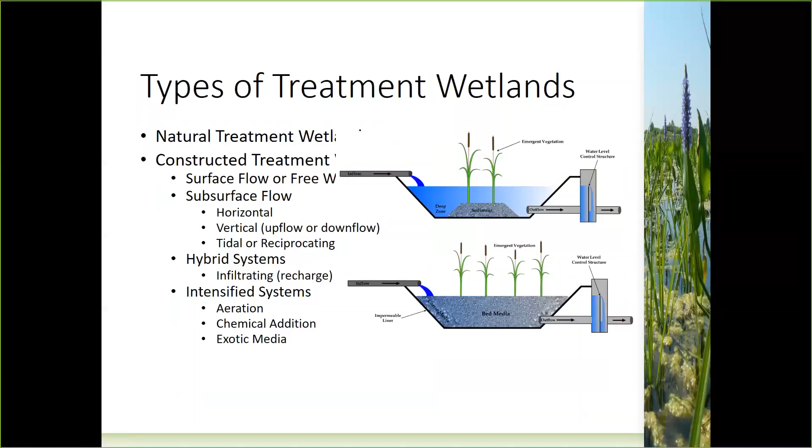There are other chemical supplements that are sometimes added that maybe make up for trace nutrients or elements that are missing for some of the processes. Various types of media can be used to provide additional adsorption surfaces. So there's a whole range of different types of projects out there.

When we get into Florida in particular and start to look at what's been done, they really fall into these two categories. There are a dozen or so natural treatment wetland system projects where existing hardwood wetland communities that maybe have had some kind of hydrologic degradation over time could use supplemental water, and have been used as a way to further polish municipal wastewaters or, in some cases, treat stormwater.

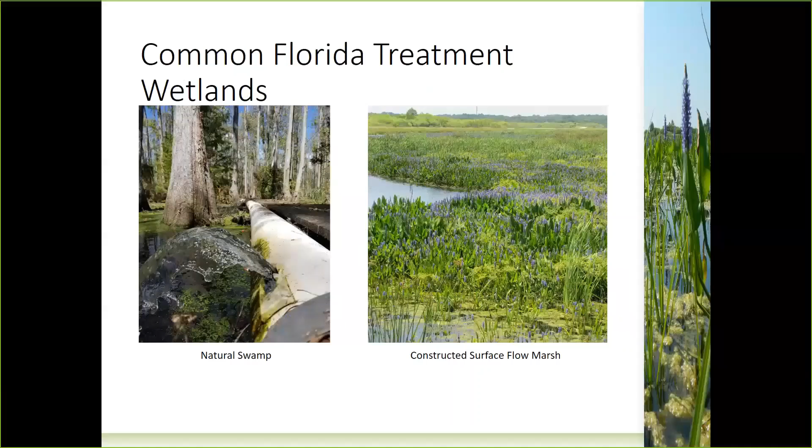What most of the constructed wetland projects are in Florida, and this represents certainly the STAs that the South Florida Water Management District has constructed south of the lake, are these constructed surface flow marshes. Within those marshes, which make up most of the types of systems that have been constructed in Florida, we talk about different plant communities. You've heard reference to most of these today.

Floating aquatic vegetation there in the top left. Emergent aquatic plants, these are the typical marsh plants you see in roadside ditches and retention areas. Submerged aquatic vegetation: we heard Cassandra mention coontail and the naiad and some of the species that were in the C-43 mesocosm study.

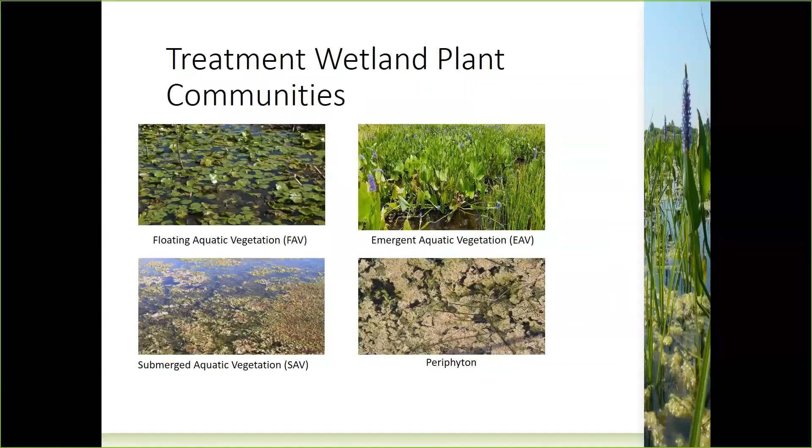And then the periphyton, which we've seen a little bit of discussion about here, which is more of a calcareous algal community that has a real affinity for binding up phosphorus in the water and tying that up in insoluble calcium phosphate compounds.

While most of these pictures of these nice pretty green systems with plants and water maybe don't look like an engineered system, the reality is that the ones that are designed well and operate the best truly are engineered treatment systems. There's every bit as much science and engineering fundamentals behind their design as there would be in a conventional wastewater treatment plant or a highway or bridge project. So don't let their beauty fool you. There is some real science and engineering behind them.

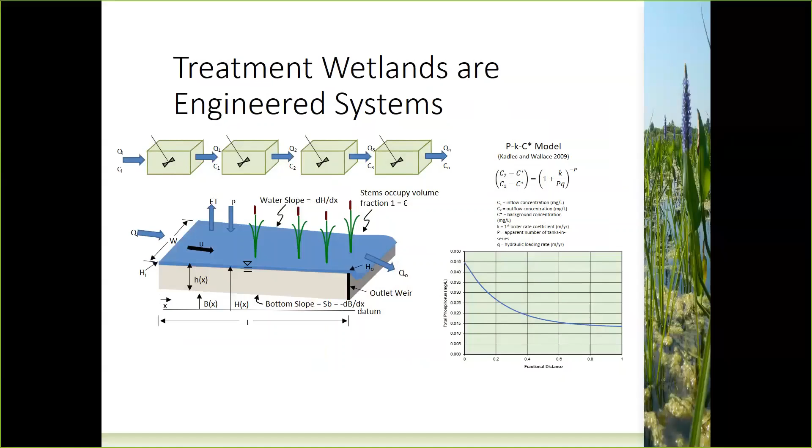I will not go through this in detail and give you a quiz at the end of the presentation.

With that said, these have been used across the United States and Florida for about the last 40 to 50 years. Some very pioneering work was done out of the University of Florida beginning in the late 70s, early 80s, with parallel efforts in Michigan, looking at both cypress swamps in Florida and constructed or natural marshes in Michigan to accept, in most cases, municipal wastewater effluents, polish those nutrients out, reduce the organic loads, as well as provide other water quality benefits.

So why do they work so well? Well, there are a lot of physical, chemical, biological processes that naturally occur in wetlands, whether natural wetlands or constructed systems that replicate those functions. Some are shown here. There are photolytic reactions driven by solar energy that can break up different compounds in the water. There's adsorption to sediment surfaces, new detrital surfaces, biofilms that cover the plant stems and the bottom of the wetland.

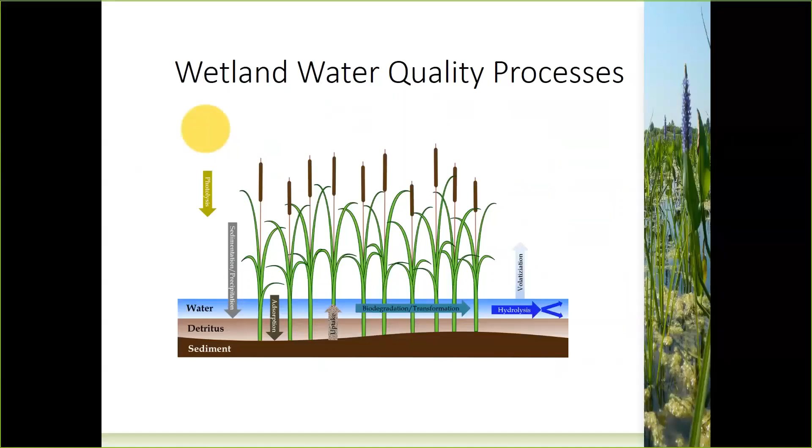Biochemical oxygen demand, that's a measure of the organic matter that's in the waste stream or the water that's being supplied to that system. That can typically get down to about a 2 milligram per liter level. Similar with total suspended solids, whether they're algal-based solids or some other form of solids, removal in wetlands is typically good for those when they're well vegetated

and operated well. The focus here has been on nitrogen and also on phosphorus in South Florida. We see that nitrogen removal in wetlands can get to 1 milligram per liter, and I'm going to show you 3 projects where those types of levels have been achieved.

The inorganic nitrogen that we've heard quite a bit about already today, the ammonia and the nitrate components, are virtually eliminated in most treatment wetland systems. The natural background concentration for those particular forms of nitrogen is effectively 0. So we can very often, particularly in the summer, when kinetics are maximized at higher water temperatures, get right down to analytical detection limits for the inorganic nitrogen parameters.

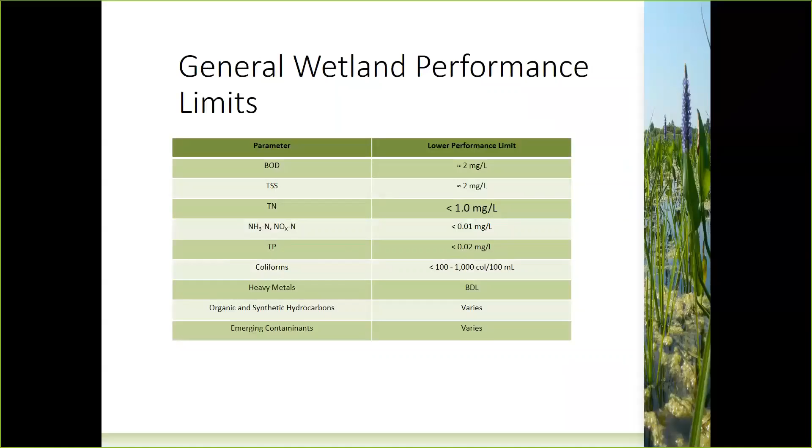Similarly, there are multiple pathways for removal of heavy metals, organic and synthetic hydrocarbons, and a wide variety of emerging contaminants that are starting to break into the news now. We hear about endocrine disrupting chemicals and personal care products and pharmaceuticals, sucralose, those types of things that come out with the waste that leaves our homes and goes through wastewater treatment processes and isn't completely removed in conventional treatment systems. Some of those parameters are very effectively removed in a polishing type wetland system.

All these forms kind of move around and interchange between the water column and the sediment compartment, and then as you move through the wetland, they change in form. There are processes available there that mineralize organic nitrogen to ammonia. There are nitrifying bacteria in there that will take ammonia and convert it to nitrate. And what's really beneficial in wetlands, as you heard Cassandra speak about just before the break, is the denitrification process.

Wetlands at their sediment interface are very anaerobic typically. It's a low oxygen environment. There's dissolved organic carbon that's provided by the vegetation in the system. There are biofilms or slimes that are full of microorganisms that cover all the plant stems and the entire bottom of the wetland. And you put those three things together and you get very effective removal of nitrogen through denitrification, leaving the water column and gassing off to the atmosphere.

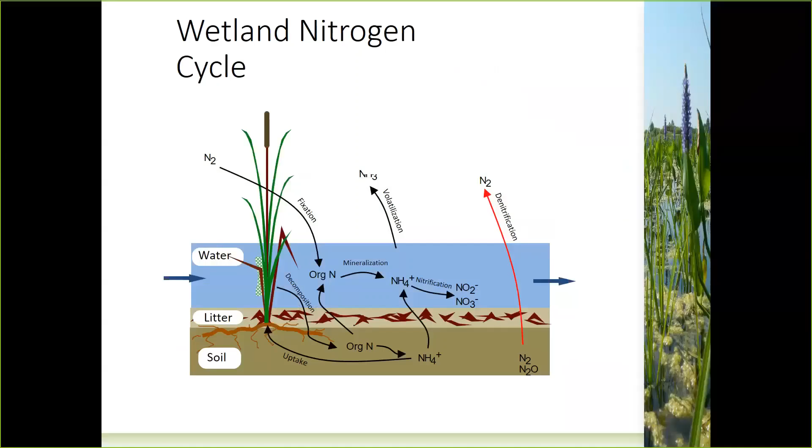3 projects I'm going to highlight now that treat different types of water across the state of Florida, but have all shown a similar ability to get to very low nitrogen levels. First one is the Orlando Wetlands Park, which is just east of the city of Orlando in the strangely for Florida named town of Christmas. It's been in operation since 1987, and it treats advanced wastewater from the city of Orlando's Iron Bridge Water Reclamation Facility. It treats a flow of about 16 million gallons a day. It's 1,200 acres in size.

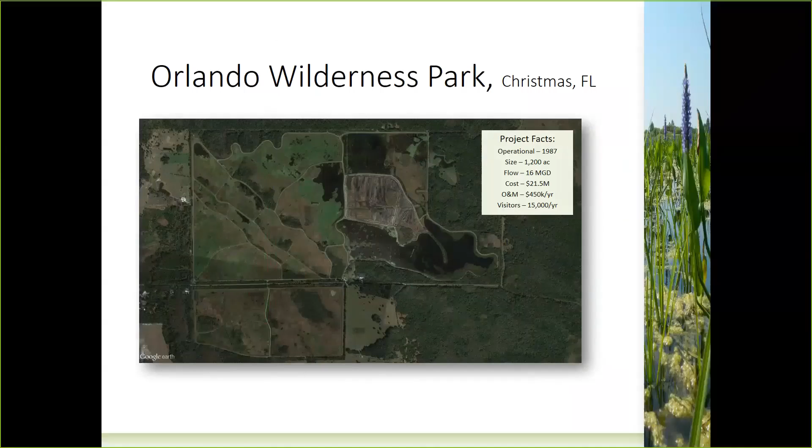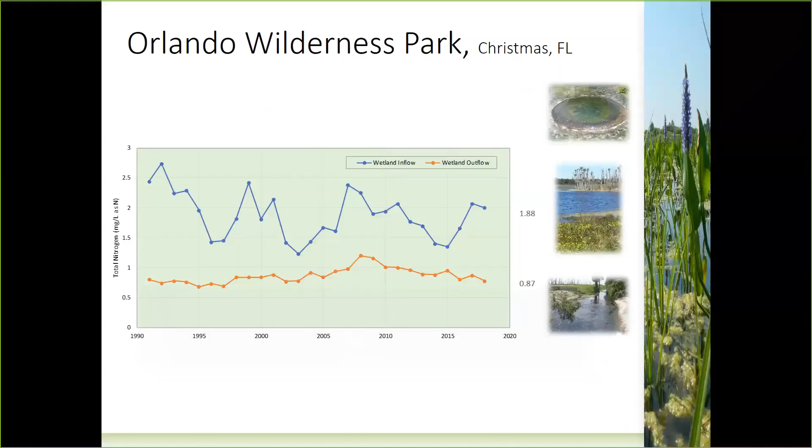So we see that over this long operational history, the inflow nitrogen for this facility has averaged 1.88 milligrams per liter, and the outflow has been well under 1 at 0.87. Again, this is one that treats all municipal advanced treated wastewater.

This next project is located in Gainesville. It's called the Sweetwater Wetlands Park. This one treats combined flows of treated municipal wastewater, reclaimed water, as well as watershed runoff from a several thousand acre urban watershed.

But as you see, because you've got that denitrification process, it works so well in wetlands, we don't have any problem getting this system down to about that 1 milligram per liter mark for total nitrogen leaving and going to the receiving system.

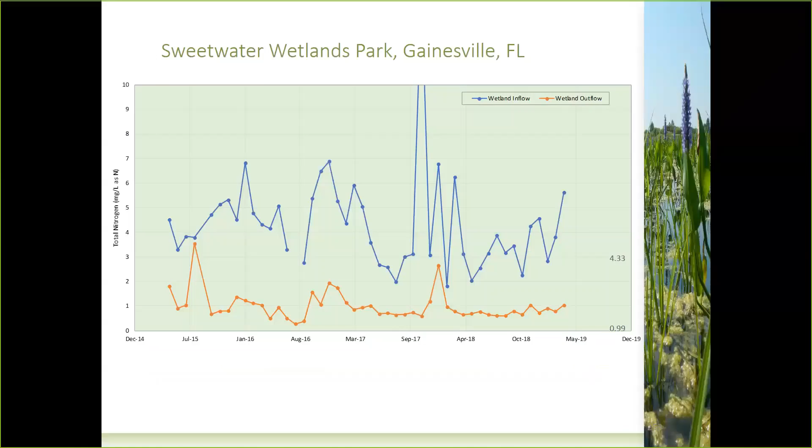The last project is one that's a little closer to where we are now. This is Freedom Park in Naples, which treats purely runoff. This is not a reclaimed water project or a reclaimed and stormwater combined project. This one's all watershed runoff. It's capturing the water from about a 3,000 acre watershed and treats about 200 million gallons per year of flow and reduces those concentrations in that nitrogen by about 41%.

And we see that this treatment wetland system is similarly capable of getting those nitrogen concentrations down below a milligram per liter. So again, this is because all the inorganic nitrogen basically is being removed, and those little bits of available organic nitrogen that are being produced in the system, as Cassandra showed, are also being consumed and reduced.

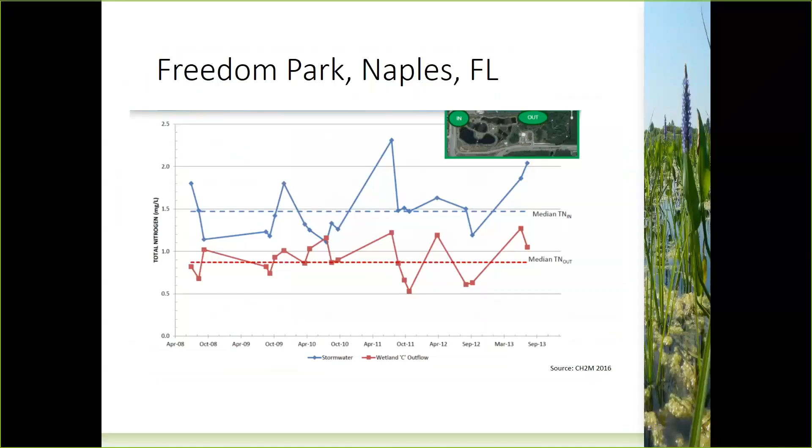As part of some previous projects for the water management district, we looked at performance from a range of systems across the state, evaluated those data based on vegetation type and soil type, and started to see if there were any differences there. And what was interesting for nitrogen, and this was borne out again in the mesocosm project that we just heard about, was that there wasn't a very clear difference in performance across vegetation type for total nitrogen.

The same is not true for phosphorus. The submerged aquatic plant periphyton community showed a much better removal efficiency for phosphorus as a function of vegetation type. So there's some differences there depending on what parameters you're really interested in improving.

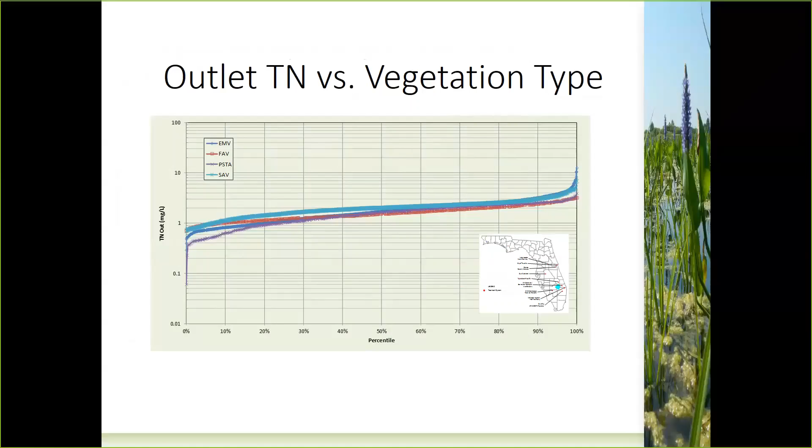However, when we look at it based on sediment type, we found some very interesting differences relative to total nitrogen removal. We grouped these based on the natural substrates that were there for those treatment wetland systems, whether they were clay, peaty organic soils, sand, or lime rock. And what we found was that the sandy mineral soils consistently produced the lowest nitrogen concentrations.

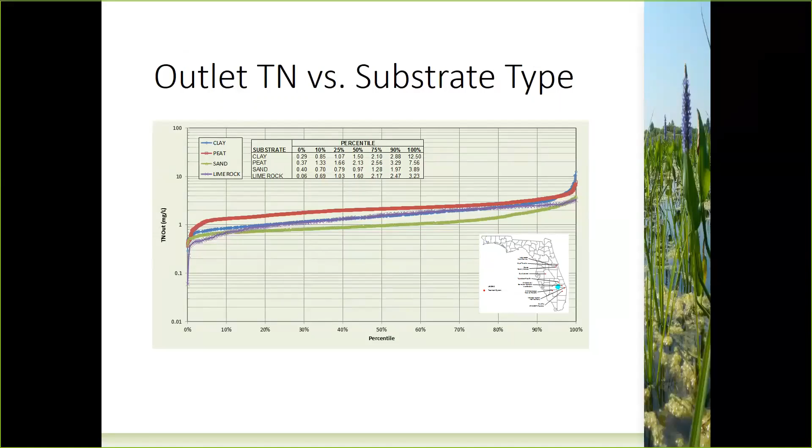That is why this kind of spiraled into the work that Cassandra talked about, why the soils that were put into those mesocosm tanks were sandy soils from that site, and why we went to the next step of then looking at any labile nutrients that were there and doing the acid and peroxide rinses to liberate those and free them and be able to really compare that difference. But kind of across the board, and this is consistent with the Freedom Park project, the Orlando project, and to some degree the Sweetwater project, they're all constructed on mineral soils.

There are differences in how you approach a design and how you approach operation, whether you're concerned with load reduction or concentration minimization. There are big differences between the STAs that are south of Lake Okeechobee that are trying to minimize the outflow phosphorus concentration versus the couple of STAs that have been constructed on tributary inflows to Lake Okeechobee, such as the Taylor Creek STA, that is focused on load reduction.

They operate at different efficiencies and they operate with somewhat different purposes. So it's important to understand at the outset of a project what's the goal, so that you can approach the design in the right way.

As we just saw on the previous slide, selecting the right site. The soils matter. If you want to go and absolutely minimize nitrogen concentrations, probably don't go build an STA or another type of treatment wetland system on a peaty organic field. Choose a better place for it.

Maximizing hydraulic efficiency. This is that whole green blob thing. You can have something that looks like it's unorganized and maybe just this green space, but if you really want to maximize the water quality performance benefits out of that area, the grading design is important. The location of inlet and outlet structures, the internal flow redistribution is important. How it's analyzed, how the cell geometry is laid, and how that relates to velocity and depth control and a whole variety of other issues.

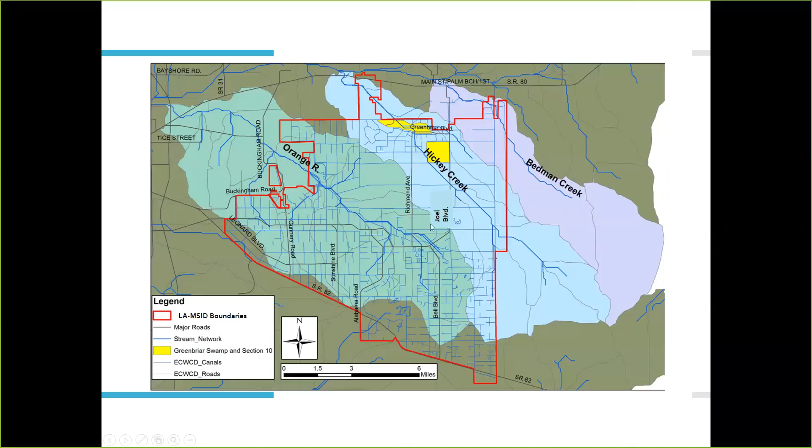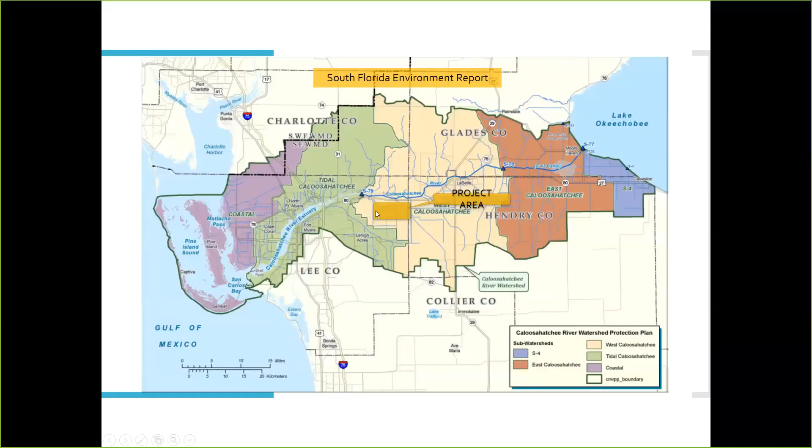And we've seen this picture today where the project area is. You can see our project area that we're going to look at today is about in the center. This is our district. It's 110 square miles. It has 311 miles of canals, 20 lakes, culvert crossings. We have quite a few weather stations, 31 weather stations. We have 109 water control structures, and 64 of them are automated, so we can control where our water goes pretty good.

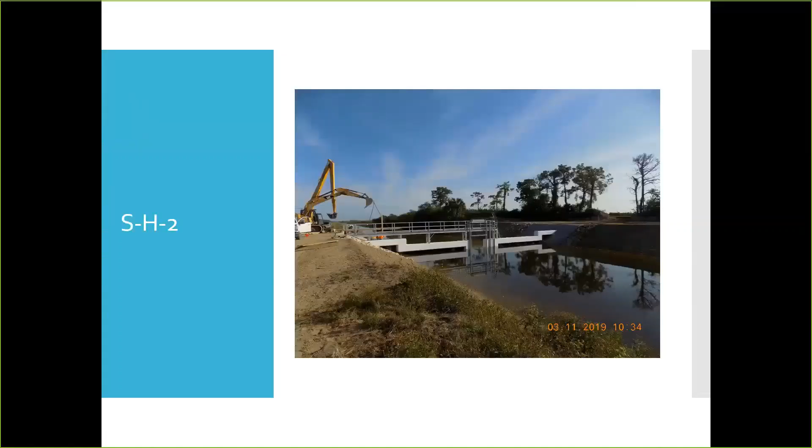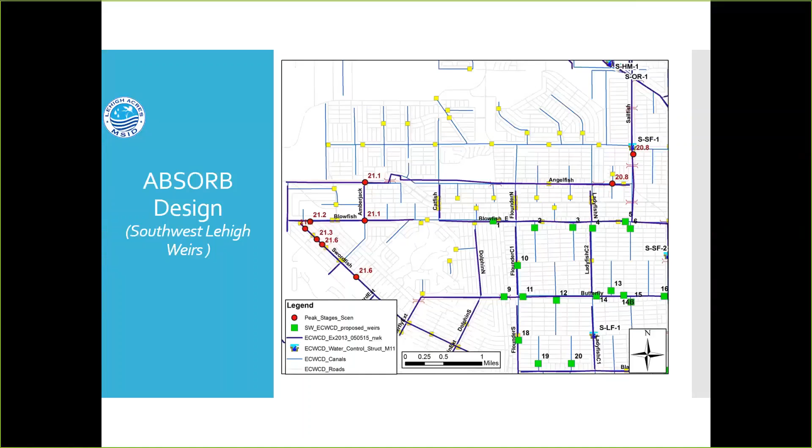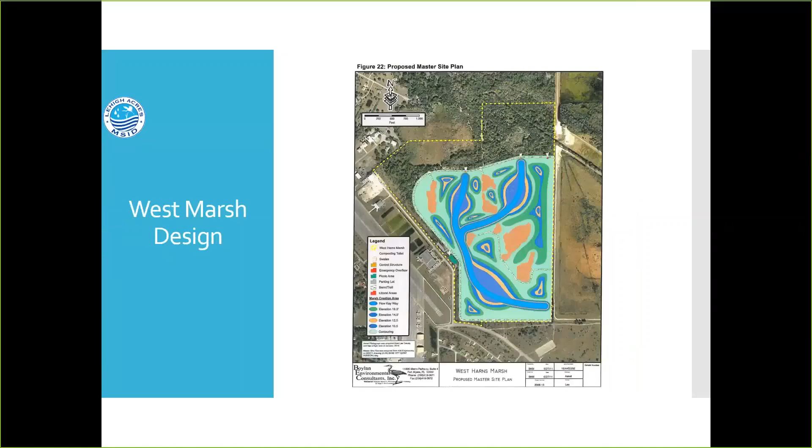This is the picture of Harns Marsh, 587 acres, been there a long time. A lot of people do like to bird watch in that area as well. The West Marsh is over here to the west. This is the conceptual plan that was drawn by Boylan Environmental Consultants, and we are about halfway through the excavation of this project. So there'll be some deep lakes. We're restoring. We're leaving the wetlands actually in place and creating filter marshes throughout the rest of the project. All of this dirt is being moved down to the State Road 82 widening project.

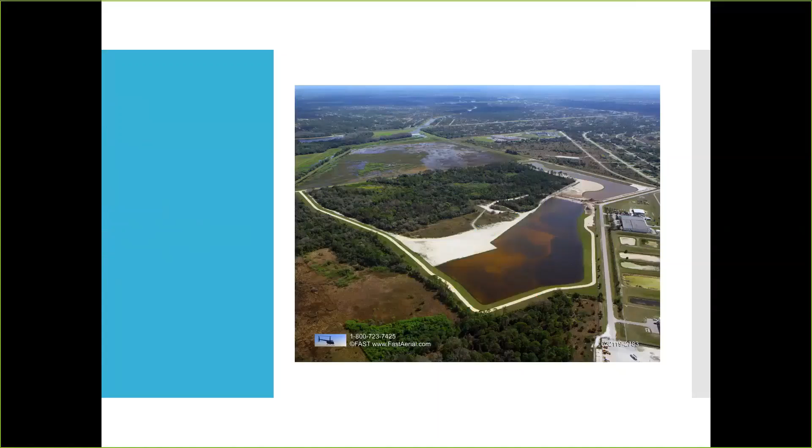Crest, I just mentioned before that we moved a structure 1,000 feet south. The structure was moved down here by this Crest project, this little square right here. That's a 205 acre parcel that we have purchased recently. That's a picture from a drone. This is the conceptual plan right now from our engineers.

We'll bring water in off Hendry Canal to deep lake storage through a filter marsh, and then into deep lake storage again, and it'll outfall back into the Hendry Canal. That will be a treatment process that will be going on all summer long until we get a heavy event. We'll be pulling water in a heavy event out of Dog Canal, which is a half mile away from our Hendry Canal, filling up our storage and then conveying water from Dog Canal to Hendry Canal to help some flooding issues that we also have in big events.

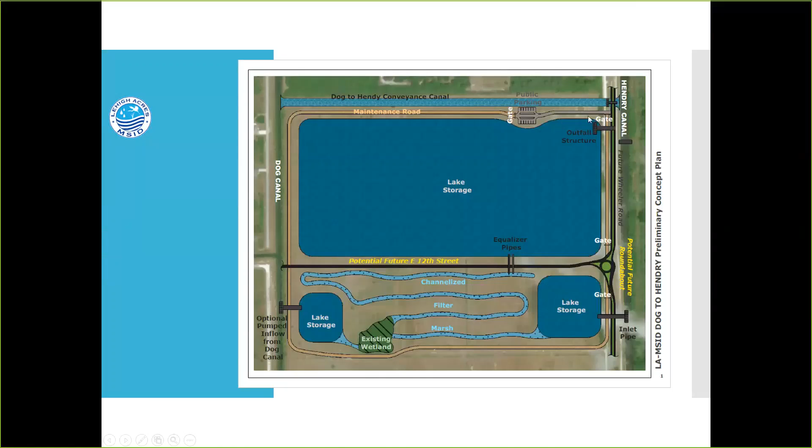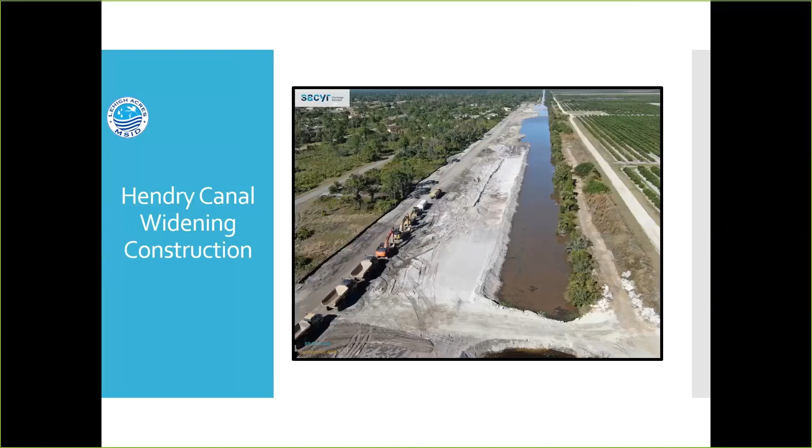Hendry Canal widening. We're widening 3.5 miles of our canal from 80 feet wide to approximately 200 feet wide. All of that dirt is being taken down to the State Road 82 widening project. So DOT basically has built the West Marsh and are building this at no cost to us. They're discharging their water from State Road 82 into our system. We worked out an agreement on that, so that worked out well for everybody. Both sides save money. This is just an early picture of the widening process. Between the two projects, they're taking about 100,000 dump truck loads from our projects to State Road 82 widening.

That brings us to why we're really here. Options for the quality treatment on the C-43 Reservoir. We have some options here. We have the GS10 project that I'll get into, the Carlos Waterway that we own. Dog Canal and Bedman Creek are all treatment options that could be used by the Water Management District. And of course, the benefits that we've been talking about with all the other projects: reduces freshwater imbalance, reduces nutrient loading. That also gives public-owned lands some storage, some ability for recreation.

The GS10, this is another project that we worked with Lee County. They purchased an entire section of land within our district. We nominated the parcel to the 20/20 program, and then over a couple of years, things were worked out, and just a month or two ago, Lee County did purchase the project, and out of the 627 acres, about 560 we're going to use for a water quality water storage project. You get the same benefits basically here. You get the extra storage, the water quality, flood control, you get wildlife and recreational enhancements as well.

This is what our staff drew, with numbers that we had back a couple of years ago, and I think they're probably still pretty much the same. The top of the berm for C-43 Reservoir is going to be at 57 foot above sea level, where natural ground's at 19.2. So when the reservoir is full, it'll be 42 feet above sea level. You could discharge this water into our canal, and to our next structure, it could all pretty much gravity flow. Our next structure is at 16.4,

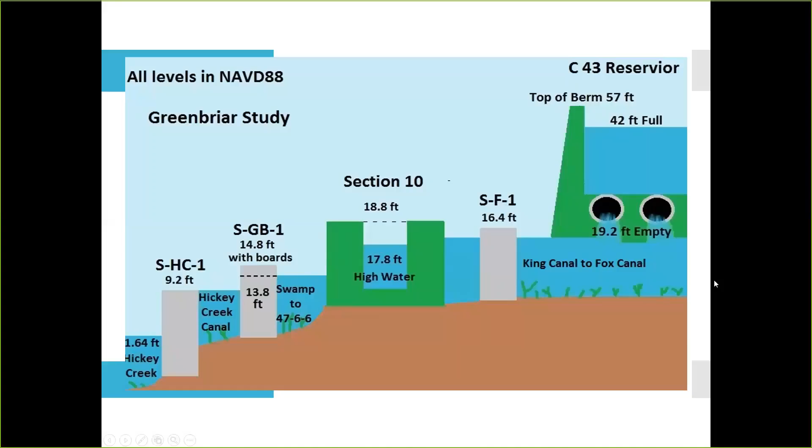This project has a lot of merit, and I know it's going to need a lot more study to make sure that it's going to work well for everybody. But the beauty of it is we're going to be using this system all summer long in the rainy season, and in the dry season when the C-43 needs it, we won't be using it, so they could basically take control of that system.

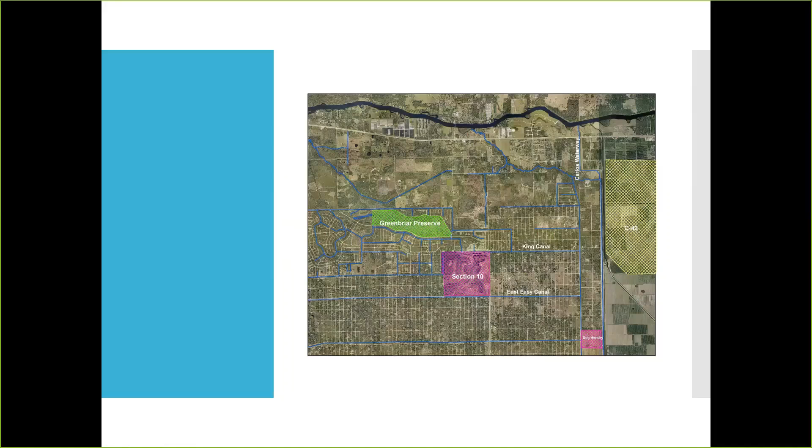This is an aerial of section 10. It's an old mining pit. They used most of this. This is mostly a lime rock pit that they used to build the roads in Lehigh Acres many years ago. So it's partially excavated, so it'll make it a little easier for us to manage.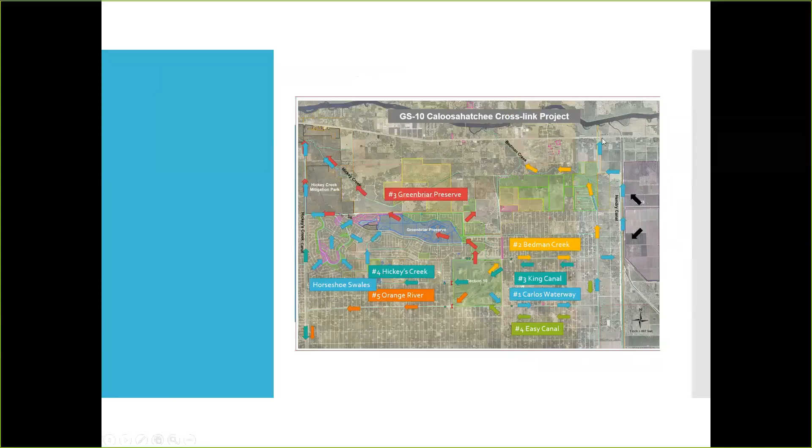The next one I'm going to talk about, since we've pretty much finished up with section 10, is our Carlos Waterway that's already existing, already has a discharging point to the Caloosahatchee River. The same type of a drawing. We got, again, the water levels up to 42 feet elevation there in the reservoir when it's full. We've got 5 structures in Carlos Waterway, and everything can just gravity flow down into the Caloosahatchee.

Now, in between these structures, which are sheet pile, sharp crested weir structures, right now it's just a 350 foot wide grassy swale, but that could be modified to make those into some kind of a filter marsh system that would provide more water quality.

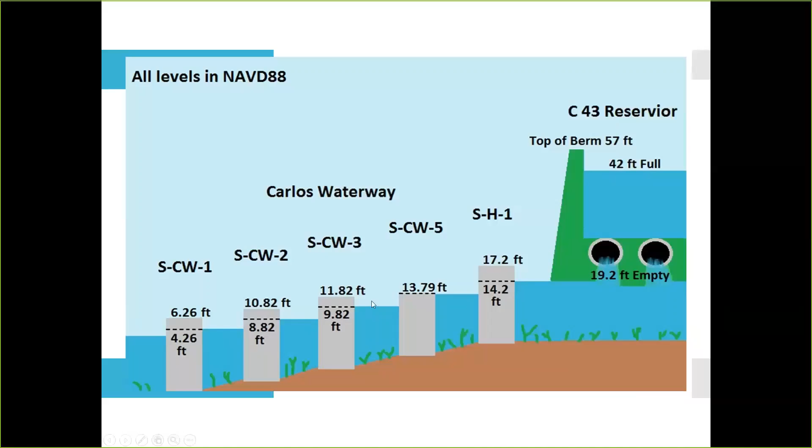And again, we're not using that system. We stopped discharging into that system probably in September, October. From that point all the way up to the following June, we're not using the system. So due to its location and the operation schedule of the Carlos Waterway, I think it should be studied and be a very interesting option for some of the water from the reservoir. It's certainly not going to solve the whole issue.

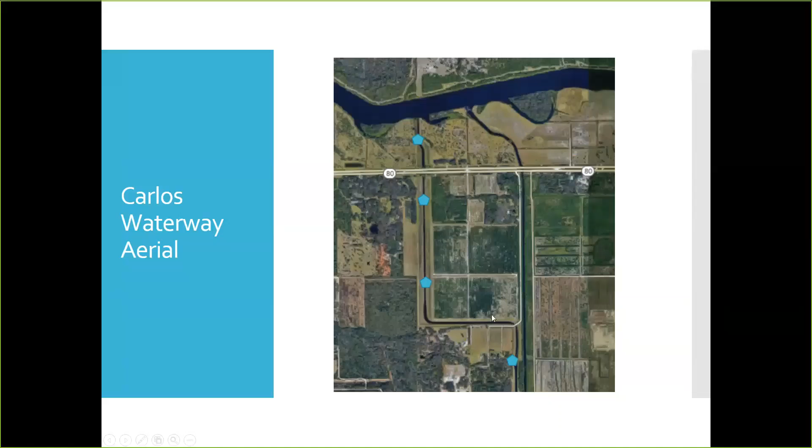But between the two projects, we've quoted Roger Kopp, who a lot of us know in the room. He thought that between the two projects, we could potentially handle half of the discharge from C-43. That certainly will have to come out in a study. We haven't got any hard data on that.

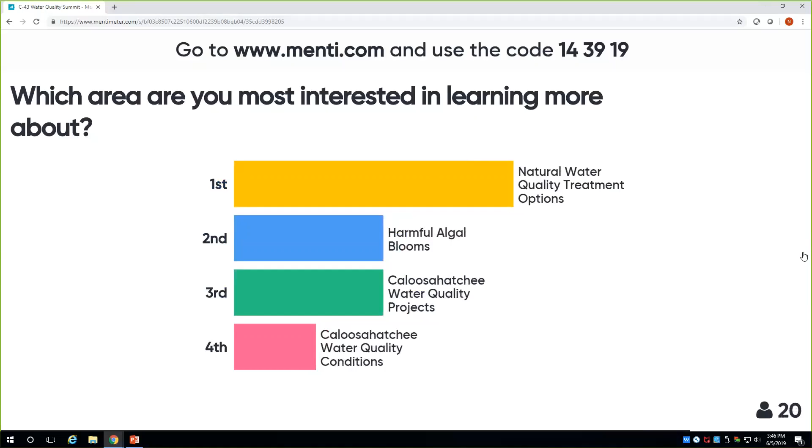All right. Looks like natural water quality treatment options was favored out of those choices. Next one, which treatment option do you think is most important to pursue? So this is a slight variation. We have new natural water quality treatments and several others, but they just disappeared. So you'll see them all on your screen. Go ahead and put the one that you think is the most important to pursue.

All right, 28 responses. Great. Climbing. So we're going to continue to let those roll in, and we'll make sure to capture and download all of these and provide these. All right, now it's stuck.

Then open-ended question. Submit what your ideas are about C-43 reservoir water quality treatment after hearing everything you've heard today. Or maybe something you haven't heard today that you feel should be considered. If you could just go ahead and enter your idea now, we'd like to collect up all of your ideas. And don't be afraid to put something down that you heard that you liked, so that you can make sure that that was considered if you heard something today that you want to continue to be explored.

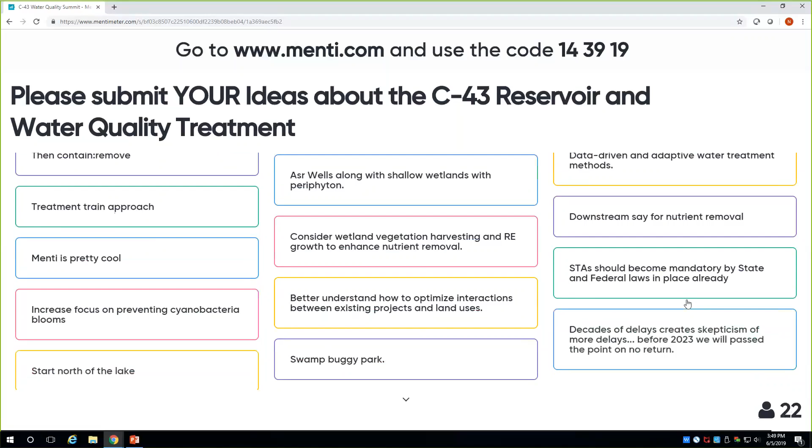All right, we have 27 responses to that, so we are going to continue to capture those as we move on. How do you feel overall about today's session? Pick an emoji. Hey, we're doing pretty good. No boring or no buenos yet, so. Oh, good. Okay.